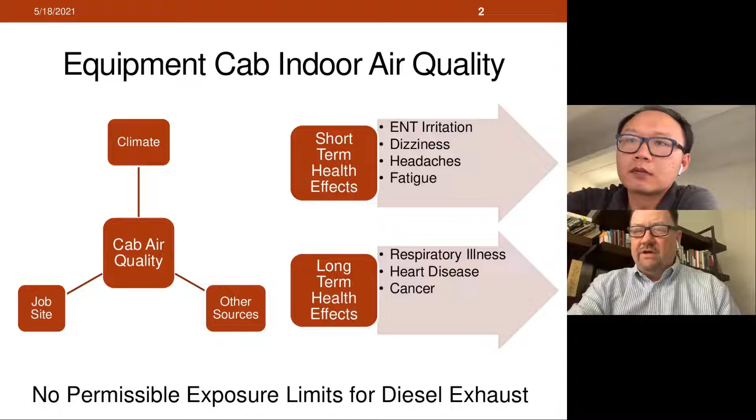So anyway, those are some of the things we were looking at with this study. What we did is we wanted to focus on some of the pollutants that we had the equipment to collect data for, but also ones that are contributing to human health.

The data we wanted to collect for the pollutants were carbon monoxide, carbon dioxide, nitrogen oxide, nitrogen dioxide, particulate matter (PM 2.5), and also black carbon.

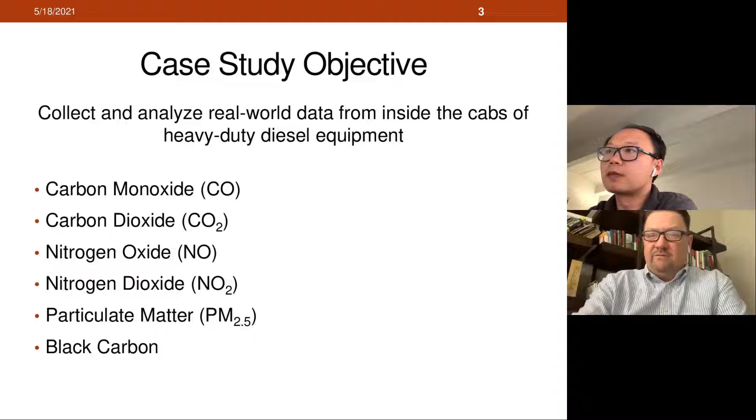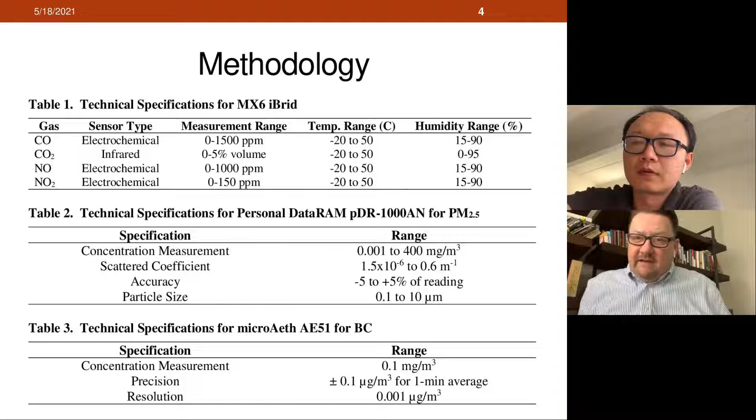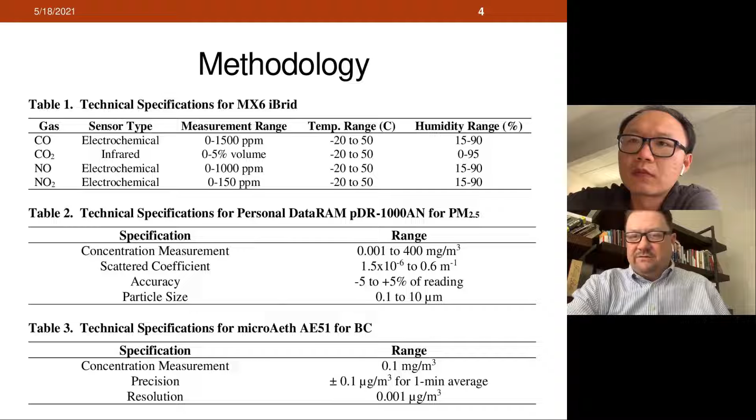So what we did is we took our instrumentation and put it inside the cab of the equipment. For the gaseous pollutants—CO, CO2, NO, and NO2—we used the MX6 iBrid instrument. We also used the Personal DataRAM pDR-1000AN for PM 2.5, and the microAeth AE51 for black carbon. Here are some of the technical specs on the instrumentation if you're interested.

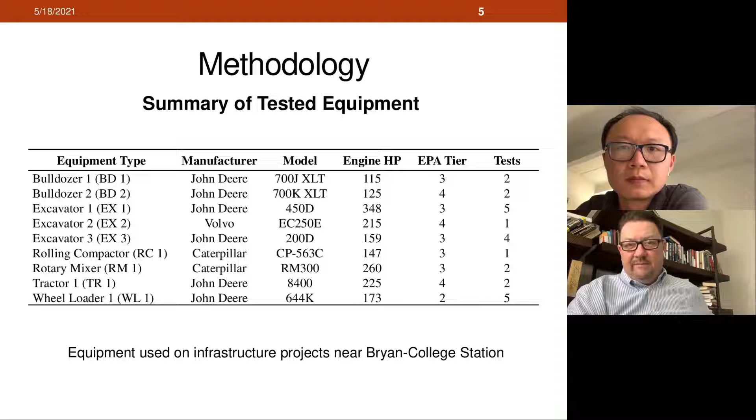We did multiple tests for different types of equipment operating on job sites in the College Station area. We collected data from the cabs of 2 bulldozers, 3 excavators, 1 rolling compactor, 1 rotary mixer, 1 tractor, and 1 wheel loader.

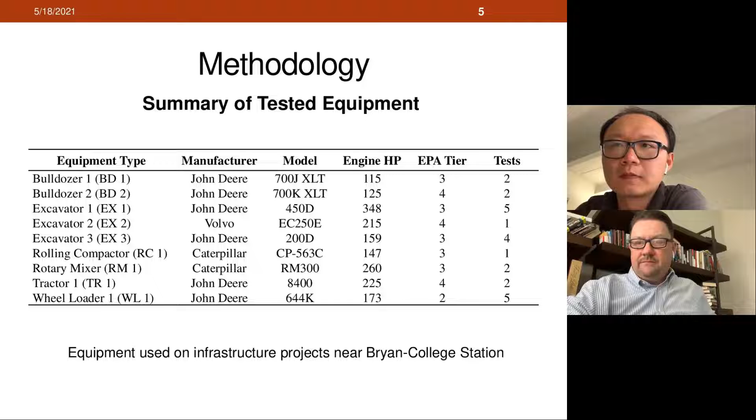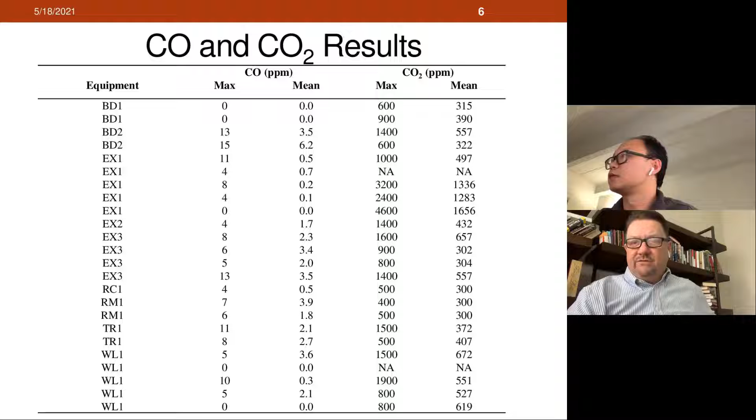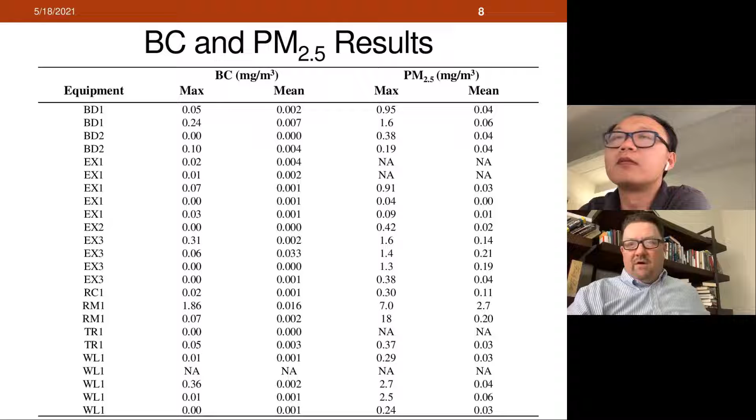So with benchmarks, what do we compare it to? The way we treated this was we evaluated the equipment cab as an indoor environment, because most of these cabs are enclosed. And in fact, all of the equipment that we tested had enclosed cabs. So we just looked and tried to find some standard IAQ measurements to use as comparison.

And these came from different areas. Some even came from the Canadian Health Organization. The benchmarks we were comparing to were for CO 11 parts per million, CO2 1,000 ppm, NO was 25 parts per million, NO2 1 to 5 ppm, and PM 2.5 0.1 milligrams per cubic meter in the short term, and PM 2.5 0.04 milligrams per cubic meter in the long term.

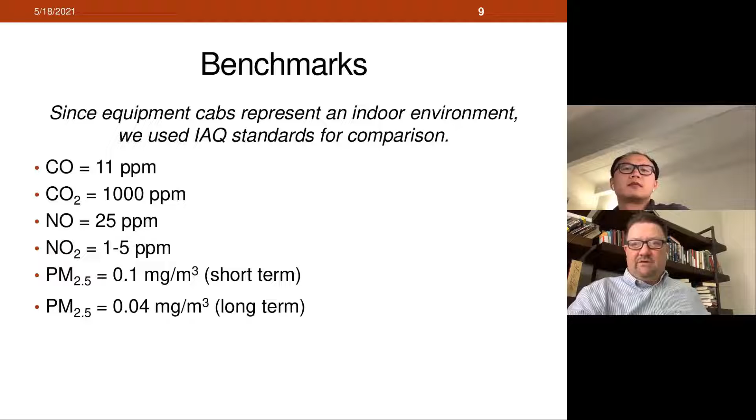So for CO, in the 24 tests that we conducted, out of all that equipment, we came up with 24 tests. Out of those 24 tests, in 19 of those, we were able to detect some level of CO. The maximum concentrations range from 4 to 15 parts per million, and that was the highest level that registered. The mean values, however, did not approach that exposure limit of 11 parts per million. So we did have 5 tests that had maximum concentrations greater than that.

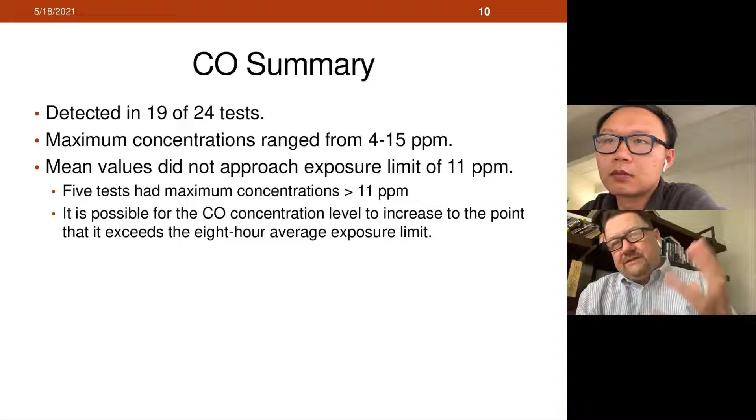It could be somewhat inferred that if the maximum level exceeds 11 parts per million, then it theoretically could get high enough that you'd have an average or a mean value higher than 11 parts per million. So anyway, CO is a pollutant for equipment cabs that could potentially become a health issue.

For CO2, here we had ambient concentrations of CO2 around 300 parts per million. For purposes of our study and based on some of the literature we saw, elevated levels of CO2 greater than 1,000 parts per million indicates poor ventilation and could lead to human discomfort. It could also lead to distraction of the equipment operator, which is something you don't really want on a construction site.

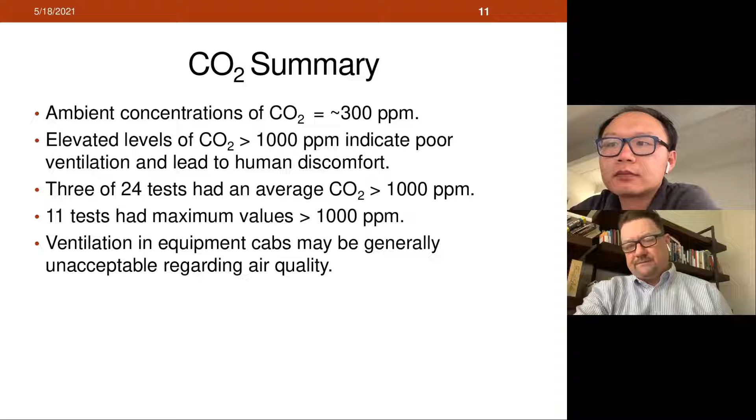So in these tests, 3 out of the 24 tests had an average of CO2 greater than 1,000 parts per million. And then we had 11 tests that had maximum values greater than 1,000 parts per million. So ventilation in equipment cabs may be generally unacceptable regarding indoor air quality, especially if you're using the standards that are commonly used in buildings.

For NO, the diesel exhaust infiltration is the most likely source of NO in equipment cabs. 15 of the 24 tests recorded the presence of NO, with a maximum concentration ranging from 1 to 28 parts per million. However, none of the mean values approached that long-term exposure limit of 25 parts per million, although we did have 2 tests that had maximum values greater than that at 28 ppm. So again, just like with CO, it may be possible in equipment cabs to achieve sustained levels of NO that could exceed those long-term exposure limits.

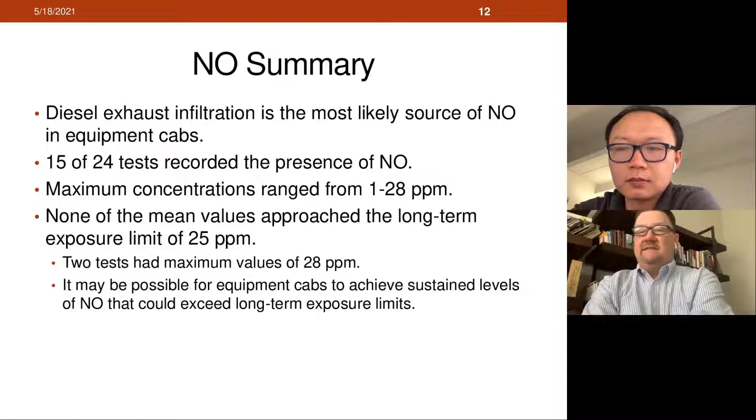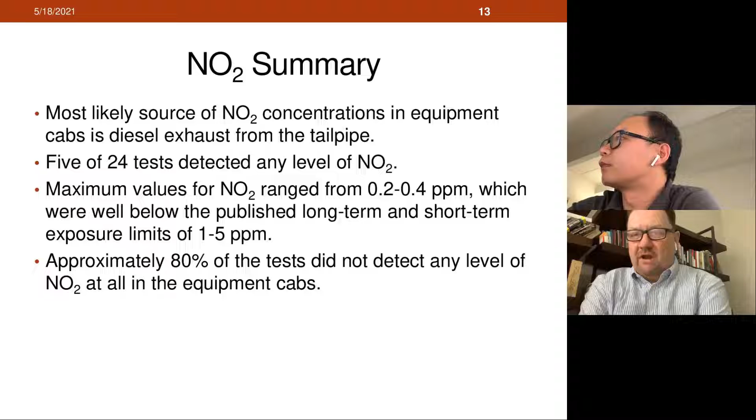PM 2.5, we had 13 of 19 tests that successfully acquired data. We had some tests that with our PM instrumentation didn't register. So we only had 19 tests for PM 2.5, but out of those 19, 13 had sustained mean values over the 8-hour period were greater than the acceptable long-term exposure range.

So I didn't mention this in the methodology, but to just clarify, the way we did these tests is we took our instrumentation and put it in the cab first thing in the morning before the equipment operators got there and started work. Just left it in there all day.

Then when they were finished working, we would go back and take it out. So we were just really trying to get an idea, an initial indication of what was going on with respect to air quality inside of those cabs. There are obviously many more things we can do in future studies, but for now we were just trying to get that initial indication.

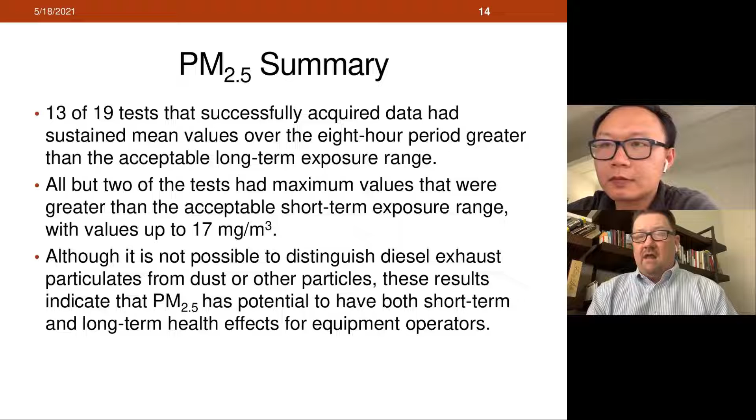So these tests were typically done over about 8 hours. And here again for PM 2.5, all but 2 of the tests had maximum values greater than the acceptable short-term exposure range, with values up to 17 milligrams per cubic meter. And although it's not possible to distinguish diesel exhaust particulates from dust or other particles, the results we achieved do indicate that PM 2.5 has potential to have both short-term and long-term health effects for equipment operators.

With black carbon, we considered that to be a constituent of PM 2.5. So the BC concentrations were lower than those overall PM 2.5 numbers we got. Even though there are no published exposure limits for black carbon, what was significant here was that we had 5 tests with maximum values that equaled or exceeded the 0.1 milligram per cubic meter short-term exposure limit. We also had 10 tests with maximum values that equaled or exceeded the 0.04 milligrams per cubic meter long-term exposure limit. So accordingly, black carbon has high potential to be a health hazard for diesel equipment operators.

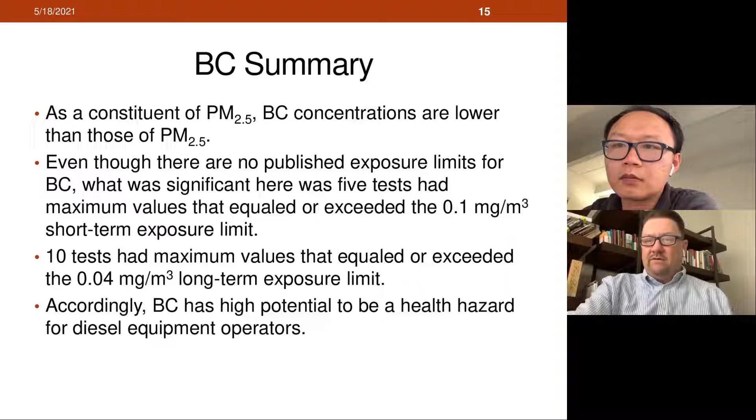So here are our main conclusions. Since CO was present in the cabs for most of the test, and in some cases we had maximum values that exceeded the recommended concentrations, we considered CO to be a potential health, safety, and productivity hazard for equipment operators.

CO2 is primarily a comfort issue for the equipment operator. We didn't see any levels get high enough for it to be really a health concern. But again, once it got over 1,000 parts per million, it does become more of a ventilation issue, a thermal comfort issue for the operator. So it may serve as a distraction that could reduce productivity and possibly pose a safety threat to others working on the job site.

So NO has potential to be a health hazard for equipment operators. However, NO2 rarely appeared in the results and does not likely pose much of a threat as NO. And then probably the greatest potential as a health threat is PM 2.5 and black carbon. Some of that's coming from the diesel exhaust, but most of it is likely coming from the job site itself because these can be very dry and dusty environments.

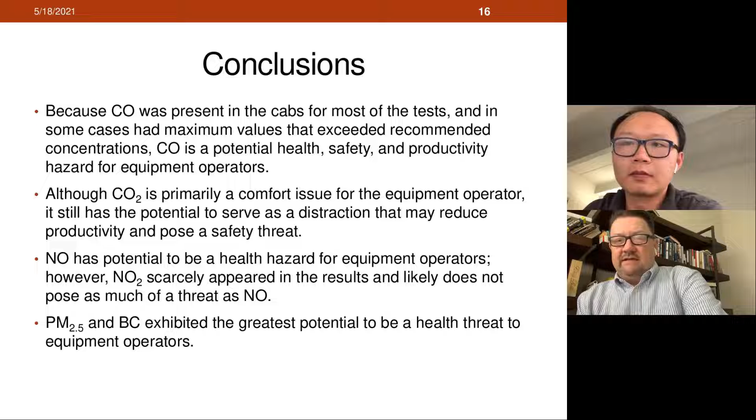So inside that cab, the main concerns that we came away with were CO as far as gaseous pollutants, and then particle pollution in the form of PM 2.5 and black carbon.

So anyway, the limitations and recommendations on our study: we sort of took the approach here that something is better than nothing, and that was just our initial study. We do have a new project being funded by CARTEEH that we're working on now, where we are testing more equipment and collecting more data. We're trying to characterize the equipment and the activities it performs during the test, and we're also trying to characterize the operator behavior during the test itself.

So anyway, I think I'm drawing very close to the end of my time, so I'll take a few questions here.

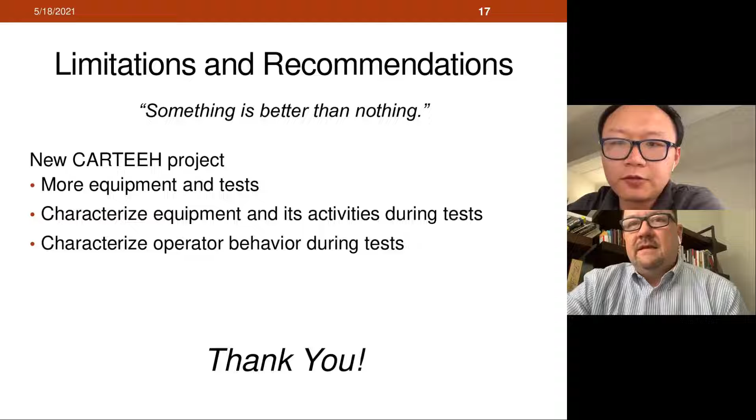Thank you, Doug Lewis. Can you still hear me? Maybe not. Rainbow asks, are you still there? I can hear you, yeah. Do you mind reading questions for Phil, because he cannot hear me. Not sure why I can't hear him. Yes, let's see.

From Dr. Mary Fox: she said, important work. Did you look at combinations—did high values occur for multiple pollutants in any particular type of equipment?

We didn't really notice any difference. Well, okay, yeah, so some of the equipment did have higher levels than others, especially the rotary mixer, because that is a stationary piece of equipment. And if you've ever seen one of these things operate, you just dump stuff into it and it either grinds it or mixes it up, so you get a lot of dust coming out from that. So yeah, the PM concentrations were really high around that rotary mixer.

As far as the mobile equipment, we didn't see one thing that just really stood out compared to the others. And again, we fully believe that's more related to the job site and the activity the equipment is performing, rather than the equipment itself.

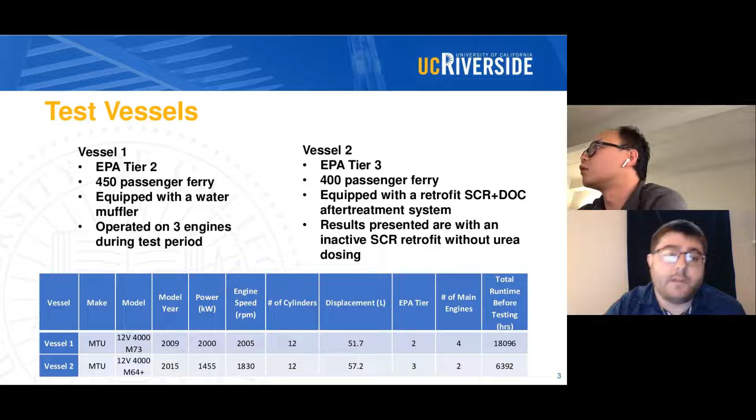All right, so our test vessels for this project, we were using 2 high-speed ferries. The first vessel is an EPA Tier 2 vessel with a capacity of 450 passengers. It was equipped with a water muffler, and when we were testing on it, it operated on 3 out of its 4 engines.

For vessel 2, it was a Tier 3 engine, and this vessel was a little bit smaller. It had a capacity of 400 passengers, and this one was equipped with a retrofit SCR and DOC after-treatment system.

However, after the test, it was confirmed to us that the SCR system was non-operational and without urea dosing. So when you view the results of this project, please keep that in the back of your mind that the SCR system was not quite working.

And below, I provided a table with some information about the 2 engines that we tested on. So for vessel 1, it was a 2009 engine producing 2,000 kilowatts, and this engine had a total runtime of over 18,000 hours.

Whereas vessel 2 is a bit newer. It had a 2015 engine producing 1,455 kilowatts and had a total runtime of about 6,400 hours.

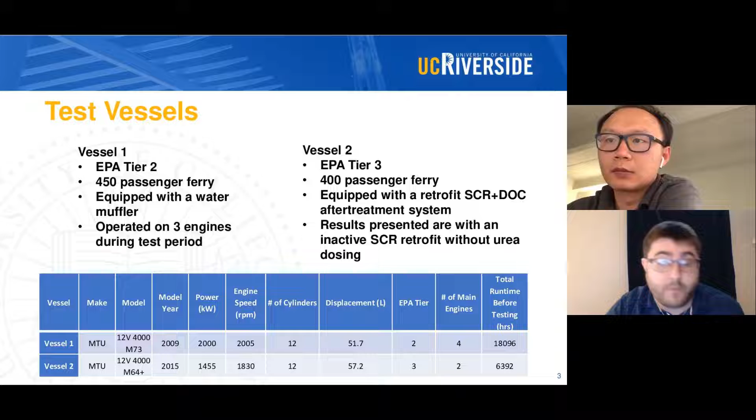All right, so moving on to the experimental setup. We used a PM PEMS and a gaseous PEMS. For the PM PEMS, it was the AVL MSS MOVE, which used 2 different measurement systems. The first and main one was the photoacoustic soot measurement, and then it also used a gravimetric mass measurement using a Teflon filter.

For the gaseous side, we used a Semtech DS, which used an NDIR analyzer for CO, CO2, and hydrocarbons. It used an ultraviolet analyzer, NDUV, for NOx, and then it also used a heated flame ionization detector for THC.

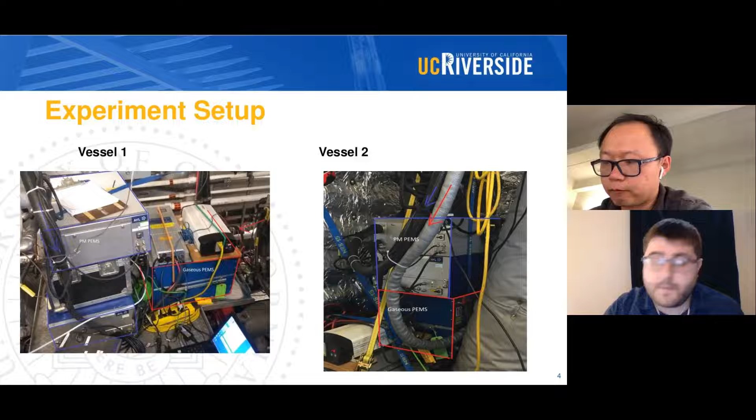So we can kind of see that there is a difference between our measured activity and the historical activity. We can attribute some of these differences to the weather that we had while testing. There might have been some operational changes to the vessel prior to testing, and also the impacts of testing, and also the length of testing. We only measured less than a whole 24 hours of activity, and that might not be fully representative of the whole historical data.

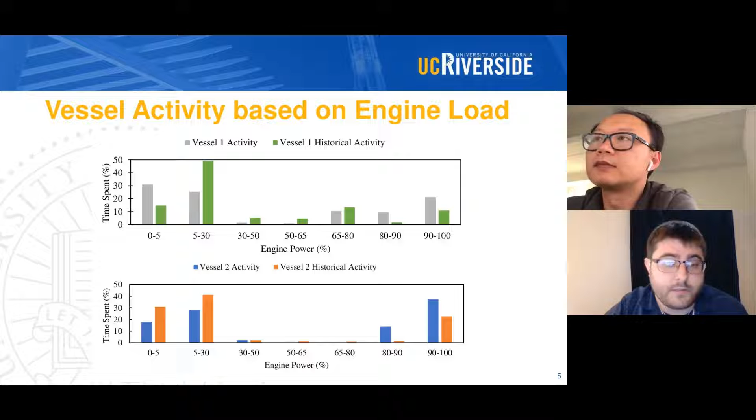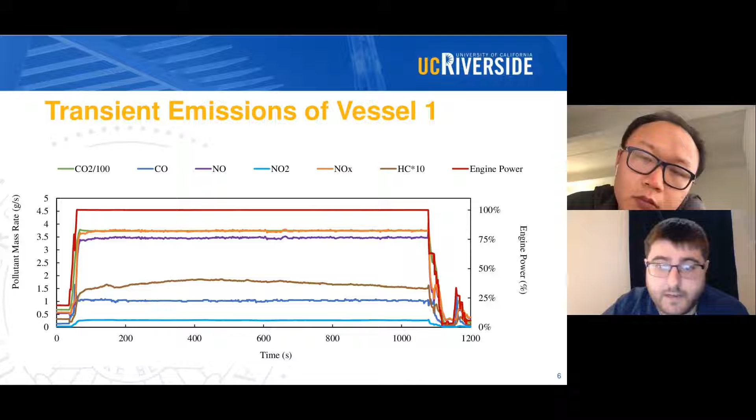Otherwise, it was basically a steady state operation.

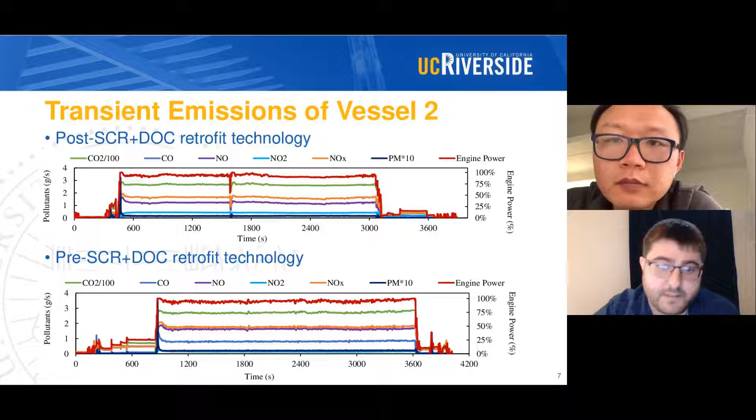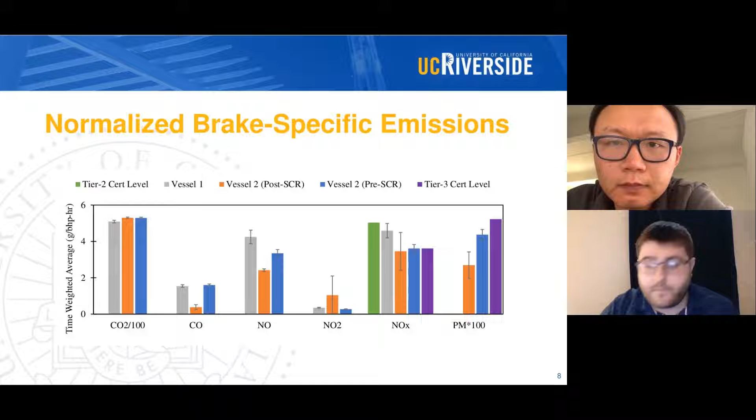One other thing I wanted to look at here would be the change between NO and NO2 from the pre and post SCR. Even though the SCR system was not fully operational, it was still on there and still having an effect on the emissions. So for the next slide, we have a comparison for vessel 2 of the NO to NO2 ratio.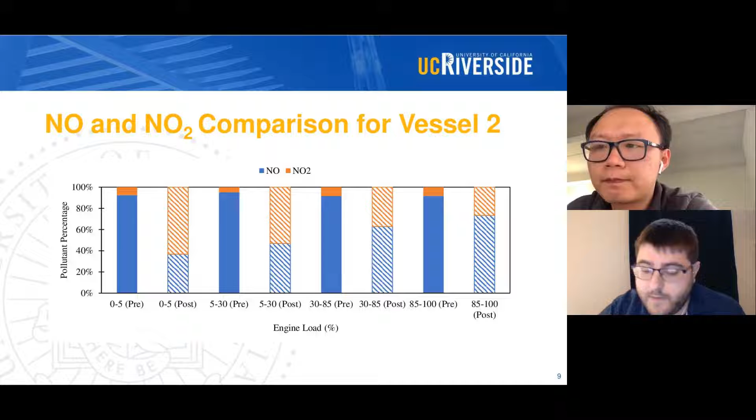I have to say that this was not part of the study, so more research would definitely be needed to investigate this more thoroughly to see what kind of effect the SCR is having. But it is rather interesting to look at what kind of effect the SCR and DOC is having on the emissions when it is not fully operational.

This occurs in low load situations when the temperature of the exhaust is not at the peak efficiency for the SCR. Previously we did show that the vessel does spend a large amount of time in these low load conditions, so it's rather interesting to look at.

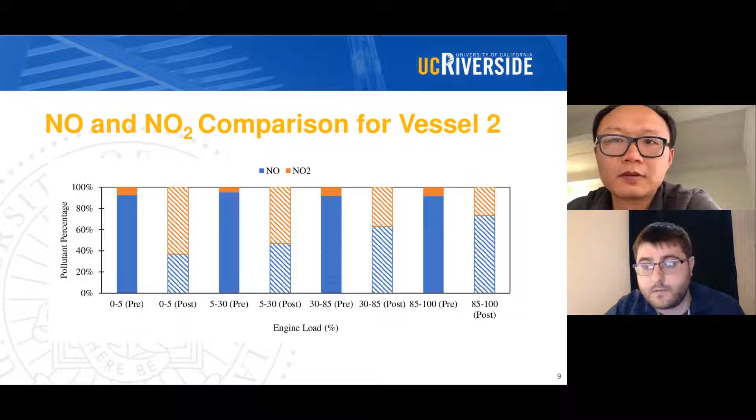As a summary, both vessels did reach their certification level for NOx emissions, and both vessels showed a bimodal distribution where they spent a large amount of time below 30% load, but also a decent chunk of time above 80% load, and not much in between.

And I believe that concludes my presentation. Thank you.

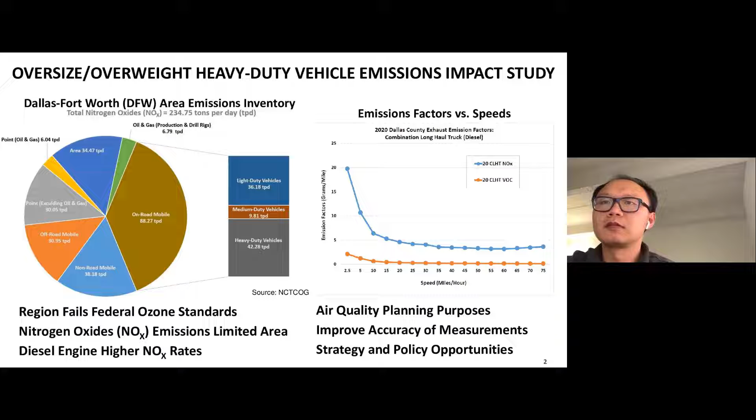To meet the federal ozone standard, it's necessary for our area to address these major contributing factors. That's where our focus is: to work on air quality programs, make policy recommendations, participate in partnerships and collaborations, and support our other stakeholders who are also doing their own emission reducing activities.

Now for the study, one of the main goals was to characterize and estimate emissions and the impacts of oversize and overweight vehicles.

Jason, your words are kind of cutting in and out on my side. Yes, I've also lost him on my end too. Hello, can you hear me? Yeah, I can hear you now. Okay, I'm sorry, I didn't see anything.

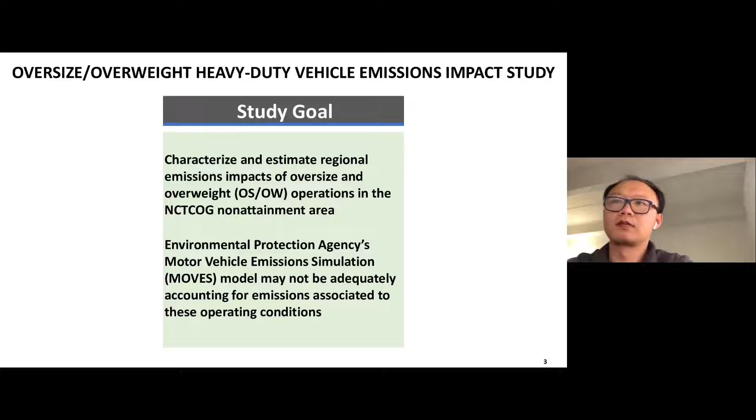Okay, so I should be on slide 3. Essentially, for the purposes of this study, overweight vehicles equated to weights that were over 80,000 pounds or above, and those require a permit to operate. I'm highlighting in this presentation just some key points regarding the overweight vehicles that were studied. We certainly have more information on oversize characteristics in our full study.

Just quickly to go into our testing design, one of the main tasks I wanted to focus on for this presentation was the tailpipe data collection aspect. Tailpipe data was collected using the Portable Emissions Measurement System, or PEMS, for both gaseous and particulate matter emissions. Testing was done on 3 heavy-duty diesel trucks covering different model years.

We had a model year 2005 and a model year 2009, and those trucks actually were without some of the key emissions technology components, particularly the SCR technology. And then we had a 2014.

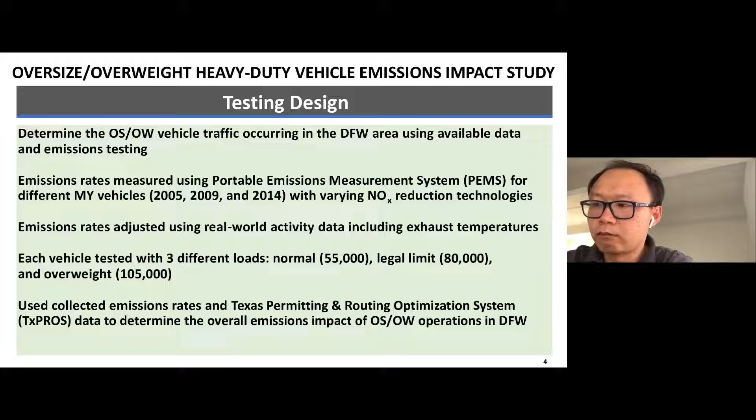Each vehicle was outfitted with the PEMS device and driven on a route covering various high speeds, up to 70 miles per hour on a highway route, and low speeds, from about 0 to 45 miles per hour, to represent arterial road driving conditions. Each vehicle was also tested under different weight loads.

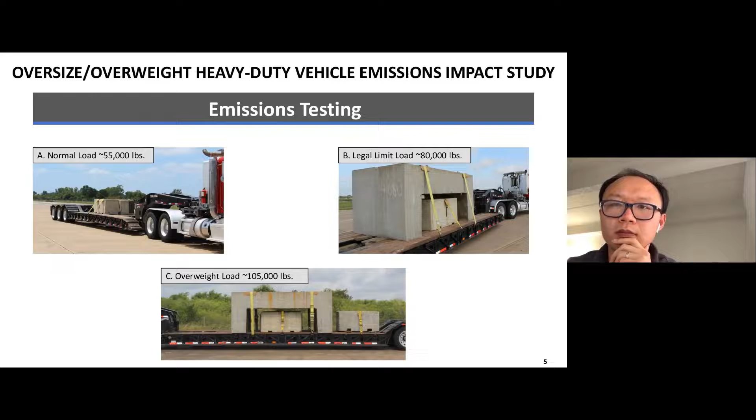As I mentioned, there was a lot to dive into with the study. I'm providing some results based on the PEMS analysis, and the next couple of slides will show key results from the emissions collected on the test vehicles.

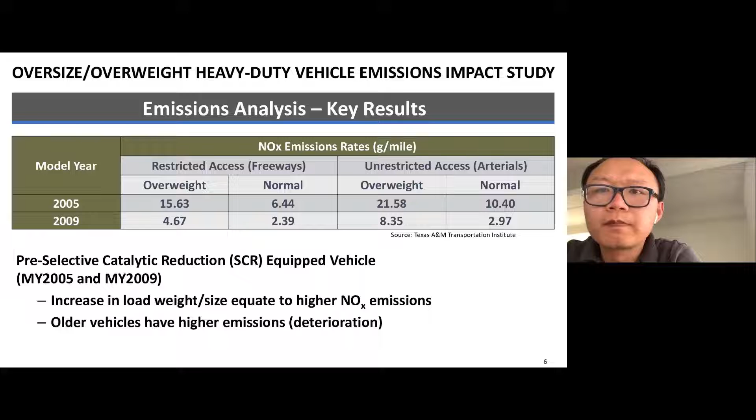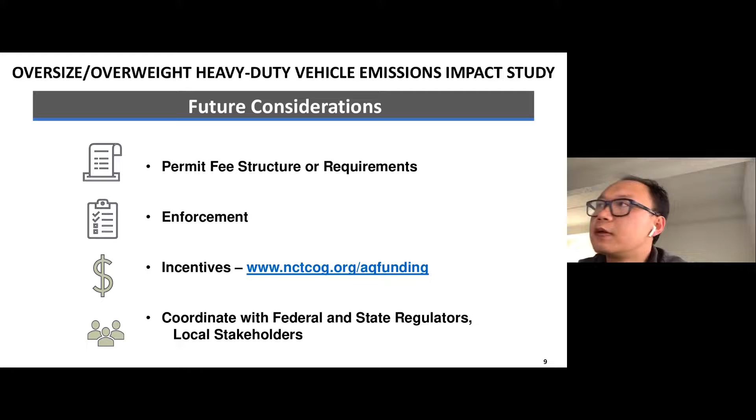And then for our particular region, we continue to help identify and promote funding opportunities to our freight industry, heavy-duty fleets, and drivers for incentivizing replacement of higher-emitting trucks and equipment, and continue our efforts as we play a role in the region's transportation planning. We want to ensure we're using this information to enhance modeling, so that we don't underestimate emissions coming from different sources. So a lot of things to consider here.

And I'll close with my contact information. I appreciate the opportunity to present to you today. And then there are links here to our final report and additional appendices. Thank you.